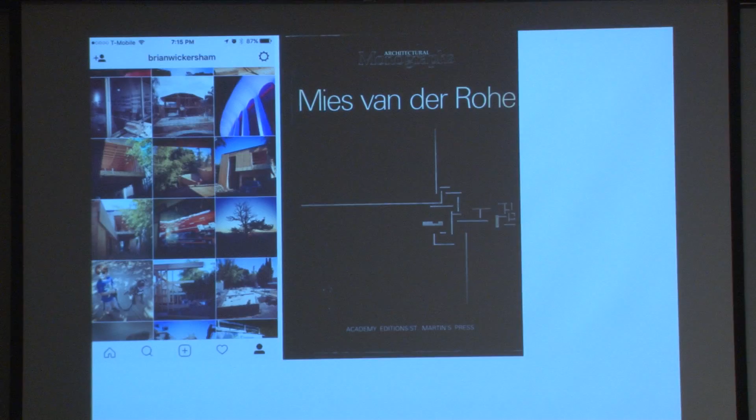I don't know that it's a bad thing or a good thing. I think it's just the context that we're working in today. And I think that it's beyond images, and it's about ideas. And ideas have become more efficient in so many ways. Could the ten books of architecture be boiled down to ten tweets of 140 characters?

I don't know if this is a good thing or a bad thing, but it sets this context in which we work, and it's ultimately the context in which we started our own practice. So within that context, for me, it's really about what are we about. When we started out, it was 2008, absolutely the worst possible time I can remember in my life for the economy.

But it turns out it was a really amazing time to start a business, because it was a time where you had to fight tooth and nail to do anything. The lessons from that time are lessons we really apply today. We made a decision very early on that what was most important to us was to build and to learn through building. We weren't going to be an office about academic pursuit or about going out and hiring PR and marketing firms. We wanted to learn from building, and honestly, if you build it, you build the business. So much of our work came from finishing projects in this period when there just wasn't a lot happening.

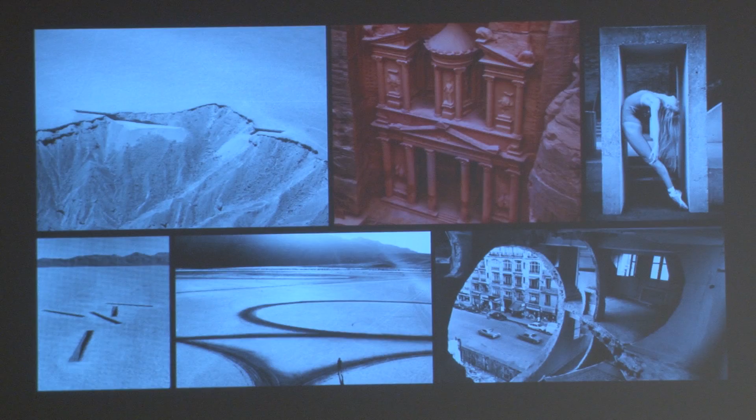Where that really starts for us conceptually is at the inside of the building. We talk a lot about this in our work - the thing that's inside is so much more important than the thing we do on the outside. I think a lot of architecture today has become this additive endeavor - you create the box, and then apply things to the outside of it. We've tried really hard with all our design to focus on the purity of the space and not add things that can easily be removed. It's this idea that if that piece was taken off the building, is it still a good piece of architecture? And if your building is dependent on that thing tacked onto the side, is it still successful?

It's that understanding, like with the Michael Heizer piece, that a really simple incision, a really simple spatial move, can be incredibly powerful. It doesn't have to be this grandiose thing. It can be really simple - to affect a surface with tire tracks, or walking in the sand, can be a really powerful thing. These are the ideas and things we're drawn to.

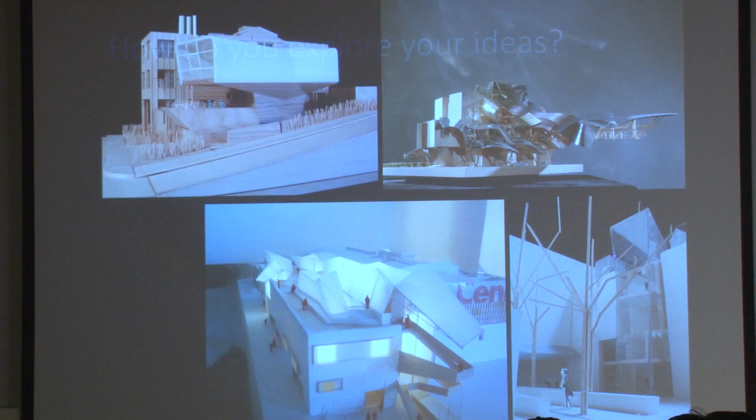For us it's really about - these are the things we love, how do we accomplish that, how do we explore these ideas. So it kind of goes back to the beginning, where you start out and where you come from. For me, I moved to LA, and my first job was in the model shop at Frank Gehry's office. I worked on the Marqués de Riscal winery, building this incredible model - about 7 feet wide by probably 3 feet tall.

As we were building it, one of the things that the more senior people in the office would always say is that the model doesn't lie. The model, if it stands in the model, it stands in reality. You can't fake things with the physical model.

From Gehry's office, I went on to work at Daly Genik, which was a spinoff from Gehry's office. It was the same methodology, studying form quickly with study models, and then gradually refining more and more those projects to come to the ultimate design. Oftentimes, like the top left image, the end result that we showed to the client was the physical model. It was something you could get down around and look at. It wasn't just a singular image that you were focused on. You really interacted with the thing.

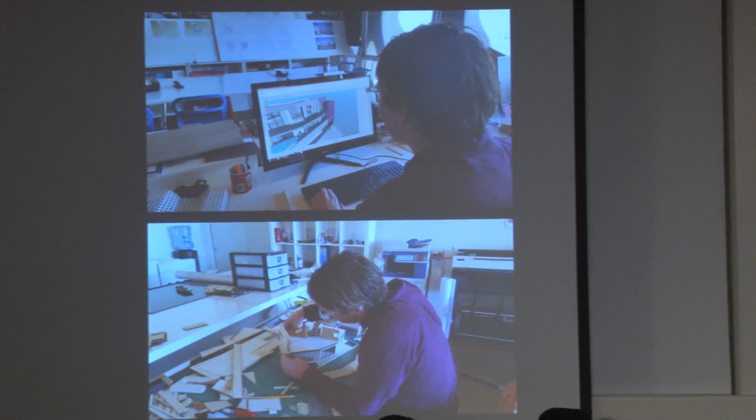These were important lessons, and they're important lessons that we use in our office today. We still build a fair amount of physical models because it is an important and powerful tool. But more and more, out of a necessity for speed or budget or just for sake of iteration, we're using computer software to do the things that we were once doing with physical models. To do that, there's a series of rules that we put in place to ensure that we're looking at it the right way, that we're not distorting things. It's sort of working now seamlessly in and out of both physical and digital realm, and prototyping and doing study models, both physical and digital.

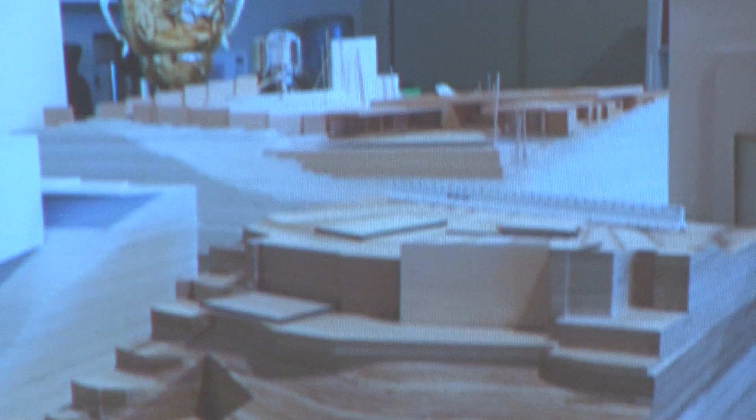Actually, I do have to stop for 2 seconds. In the back, the gold chalice there, that's the Architectural Softball League Championship trophy. Had 4 wins, I think only a couple against you though. One year, one victory in 15 years? Well, it's hard to keep track. Ed's a great player and a good friend. And so you do realize that slide is only in there to point to the trophy in the background. Are you sure you want to go on? I'm enjoying talking about this and seeing you shift around. How's the leg coming along too? You're going to be ready for, oh, sorry, too soon.

So, to the rules about how we're using the computer model, the rule that I said before with the physical model doesn't lie—there's a truth to it that we don't have in the computer. The computer can really distort things. We try to be really careful about knowing when we're trying to make an image more dramatic for a pitch on the design versus ensuring that we're using it in a way that we know we're getting the end result that we expect at the end of the day. So really simple rules like, you can't use a camera angle with a ratio more than 35 to 50 of what the human eye sees versus going to like 15, which makes a wall look like it's 90 feet longer than it really is in reality.

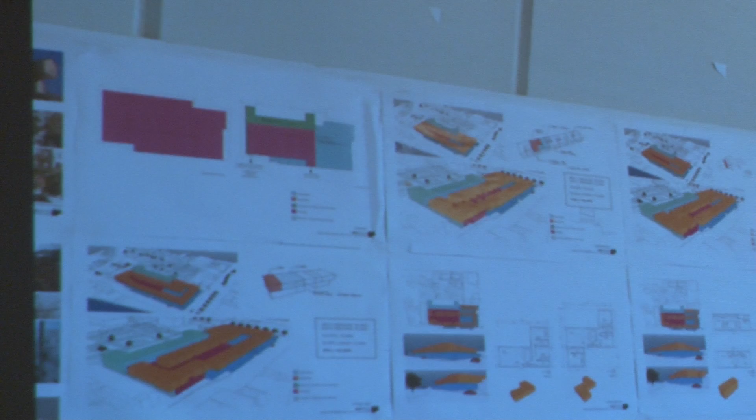The other thing is finding ways to get the digital model out of the computer. Because one of the things about the physical models is that there were things that sat in our offices, things that we interacted with, that the entire office moved around and knew about and engaged with. So one of the things that we do in our office is every day or every week, anytime there's a major milestone in a project, the team pins up screen captures of the model. This is so it's out in the office, and people are engaged with the projects that they're not working on, because a lot of times ideas come from people that aren't directly working on the project, and when it's tucked away and it's a person sitting at their computer only working on it, people don't know what they're doing. You get a glimpse, but it's not there, it's not in the consciousness of the office.

So we make a really conscious effort to have these things out in the office, and we encourage people to react to projects that they're not working on for a lot of reasons. Good ideas can come from anywhere, but I think it's also that not all the projects in the office are the big flashy fun one. We want everyone in the office to feel like they're working on every project that's happening, that their role on something else is a part of this other thing happening. That's really just this idea of team that's really important to us.

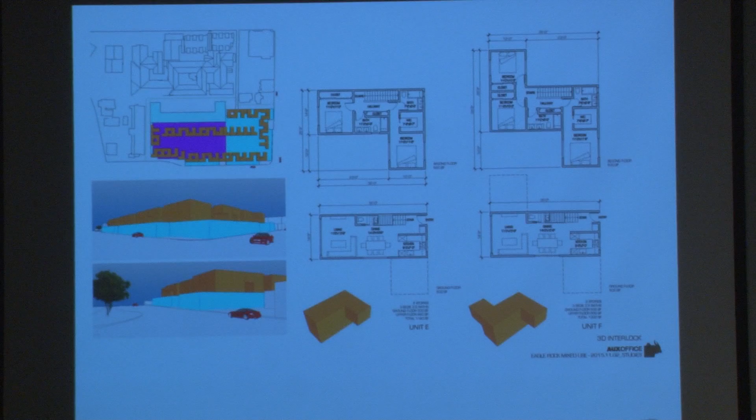Aside from that, we're really using the software and digital models to do the same thing we always did with physical models: cutting out blocks, looking at schemes, laying out different variations on an idea. Where the software is really beneficial is we can now do 10, 15 of these in a day. If this was a physical model, you'd be lucky to get through 1 or maybe 2 in a day. The speed it affords us lets us look at a lot of things much faster than we could, and I'm not that old, but just a decade ago.

The transition has been really amazing, and it's cool to apply these same lessons we learned with physical models into the digital realm. The other thing that's really important is the software allows us to look at material options and surfaces in a much more precise way than we ever could before. I think that's something physical models always failed at. You always had that one corrugated basswood panel to replicate some surface change in a building. The material shifts and the interplay of surfaces, textures and material is super important to us, so we look at a lot of options, and it lets us test out a lot of different things really quickly.

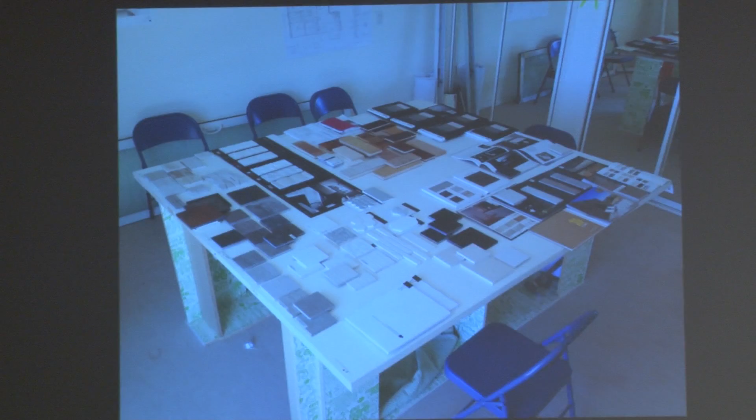Literally, if we like a wood surface or a tile surface or a stone surface, we can throw it in there, check it out, see how it looks, see what the scale of the panelization is.

These are all really amazing things that are really important to the work we do, because it's important to us not just the exterior envelope of the building, but also the interior. I think there's been a disconnect in a lot of ways with architecture, where it's become so specialized that many architects just consider themselves core and shell guys - they just do the envelope and then somebody else comes in and does the interior. For us, it's really important, that connection of inside and out, and so the materiality really is an important thing to us.

And so is lighting. With the digital models, we're able to look at variations really quickly, look at different times of day and night to see how a building's going to glow, to think about how surfaces are going to be illuminated. These are all really powerful tools that we use every single day within our studio.

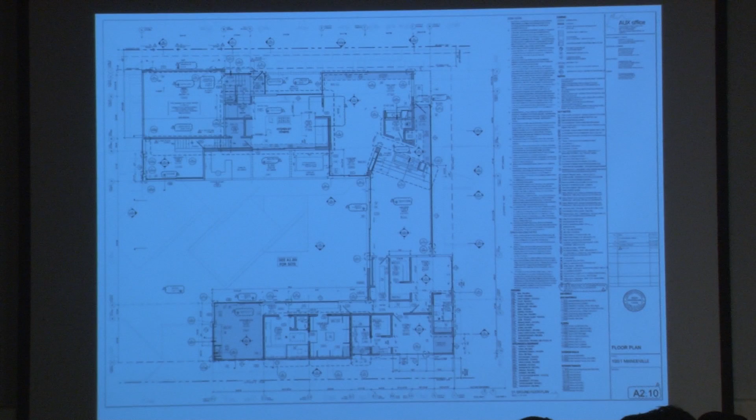And then finally, this hasn't changed much from the hand drafting days, but the last step is really doing the working drawings and really precise, high quality drawings. I know this is kind of a weird thing to talk about in an academic setting, but it's a really crucial and important part of what we do, because design decisions don't just stop at the rendering - they carry through the entire project.

It's really important that we don't make this separation between design architects and technical architects. We want the best designers in our office making decisions at every level, in plan, in section, and in detail, because it's ultimately in these details that the building really comes together. You can have a grand vision and represent something with a beautiful image, but if the detail's not there, so much is lost.

So that's kind of the method. You know these things and learn them as you go, but it really comes down to: does it work, and does the process get you where you want to go?

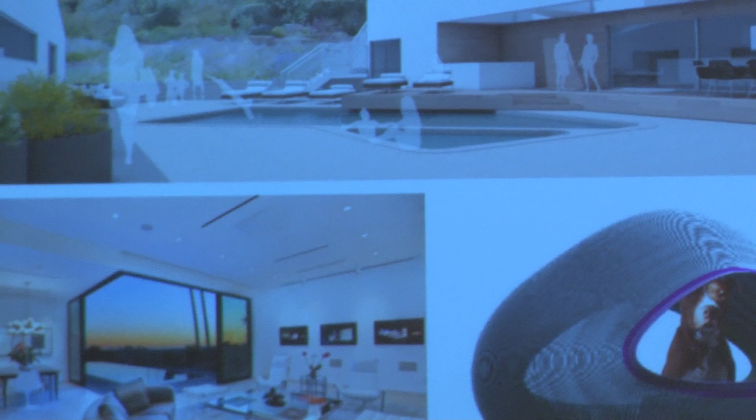The scale has really grown and shifted, but the ideas and the methodology has been pretty consistent. Tonight I really want to focus on the opportunities and moments that were most important to us along the way, the things we learned from most, the good and the bad, just to give you a glimpse into how we think.

Every office really has their first big opportunity. Obviously we had Rudy as a client, but our first thing that really got noticed and projected us into the next scale of work was a crappy house up in the Hollywood Hills. My business partner's wife literally responded to a post on Facebook for somebody looking for an architect to work on this house.

It belonged to her and her boyfriend, who's a rock star, who had just moved into it. It was a beat up place, had been lived in by a number of celebrities over the years and was just really run down. They basically came to us with this really simple thing. They said, we love to throw parties, and the problem is the kitchen is on the other side of the house from the pool. Can you design us a pool bar? It was really just that simple.

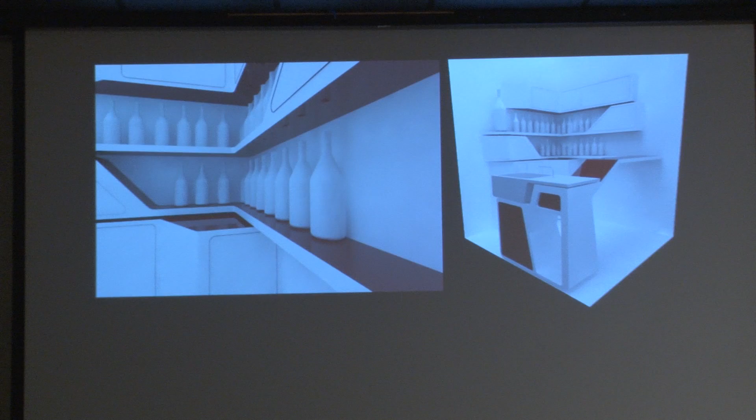So we went to work looking at what it is that would be a cool bar, a cool transition piece between the pool and the inner part of the house. We studied things with a lot of variations, looking at different material qualities and surface interactions. We worked through this process, and it was this sort of inevitable thing that happens with residential work, that it went from 'oh yeah, we need a bar' to 'well, this is the pool bar, we really got to look at the pool.'

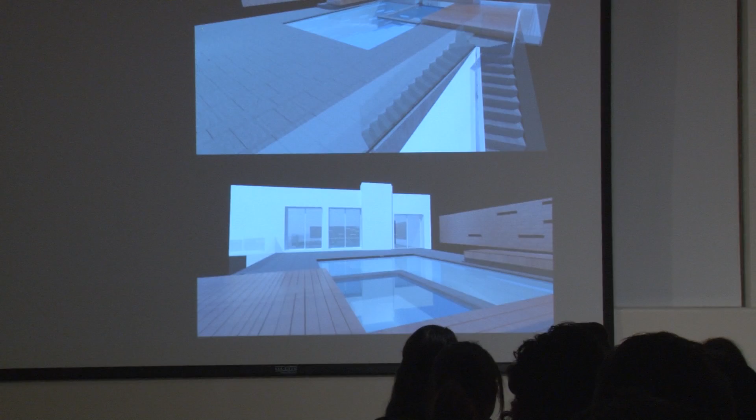So we started to look at options for the pool, how we could do a jacuzzi within the footprint of it, and a lot of different variations. Unfortunately, with some of the earlier projects, we don't have as much documentation for the process, but we went through a lot of iterations, and this became a project that we worked on for about five years.

We'd finish one thing and we'd move on to the next, but it was really about literally getting in there and just going for it, doing the dirty work when you had to try to illustrate that, no, this wall we can take out and the retaining wall is not going to fall over.

Ultimately this project, which was really a series of little installations, kind of came together. It's a modest thing, but we learned a lot of lessons about how you get a lot of impact with a little move.

Looking from the living room out, we had this really ugly wall and waterfall at one point. So it really became about how do you create something that has some rhythm, that has some meaning to a musician living in the house, and the interplay of surfaces and extending out that deck to get a little bit more area. It was, in a lot of ways, just this really simple little project that kept expanding.

But materiality and surface, ideas that are really important through our work today, so many of those ideas were in this little job. The play of light on surface, a really simple interlock of two materials, stone and tile turning up a wall, interlocked with white drywall.

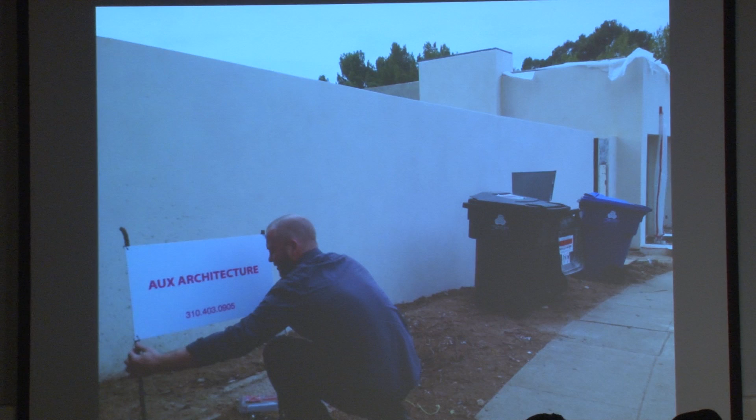So this job was a small thing in the grand scheme of things, but what it afforded us was the opportunity to hang out our shingle. It seems silly, and we never anticipated it at the time, but the fact that we were able to put our sign out when nothing else was getting built is what the entire practice really built on. As the economy was improving, people started driving by and seeing that somebody was doing construction, and would think, well, we can start to think about that too.

We literally started to get phone calls from our sign. It never ceases to amaze me that so much of our practice came from people calling that number on that sign. So just a couple examples of some of the houses.

This is up in Doheny Estates, right north of Sunset, kind of going up above the Whiskey A Go-Go. From that top vantage point on Doheny, which is the top right house, we've done 5 houses just in that little stretch. And all of that really came from that one little project.

I think so much of it was about being willing to take the risk at that time, even on a little thing, and the reward is still paying dividends today—in a lot of ways we didn't really think about or expect. The biggest one was that we were all of a sudden sort of valid, and we'd proven that we could do it. Once you prove you can do it, people believe in you. And just a simple thing like that makes all the difference in the world.

One of the contractors who had looked at that house when we were doing one of our phases took note of what we were doing, admired our drawings, admired the design of it. When his friends went to remodel their house, he said, you know what, I think these guys would be a good option for you—they're really young, they're really hungry, they're doing really cool things.

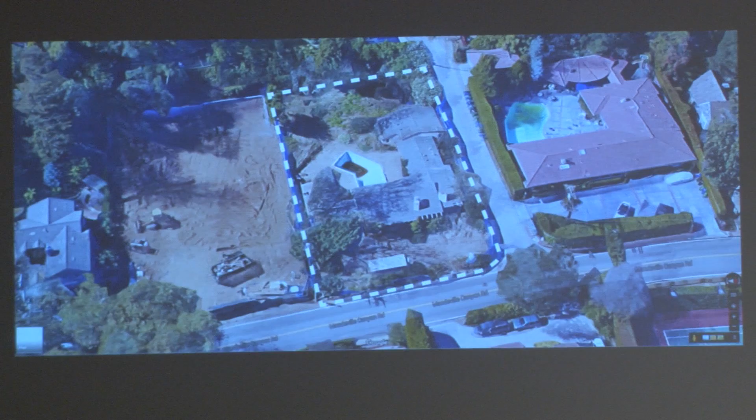So we got this call kind of out of the blue, for a house in Mandeville Canyon. It was a ranch-style house from the 1950s that sat literally right on the street—a busy street, a lot of car traffic, a lot of bicyclists, but a really prominent corner. I think it was an opportunity for us to do something at a busy intersection that people would take notice of.

So we started into this job, still kind of fleshing out the process, but ultimately looking at this house and realizing, as we had conversations with the homeowners, that they actually really liked the way the house functioned. So rather than tearing the house down, we said, it works pretty well—maybe we can strip away the stuff you don't like and do a couple really simple additions that get you the space you need.

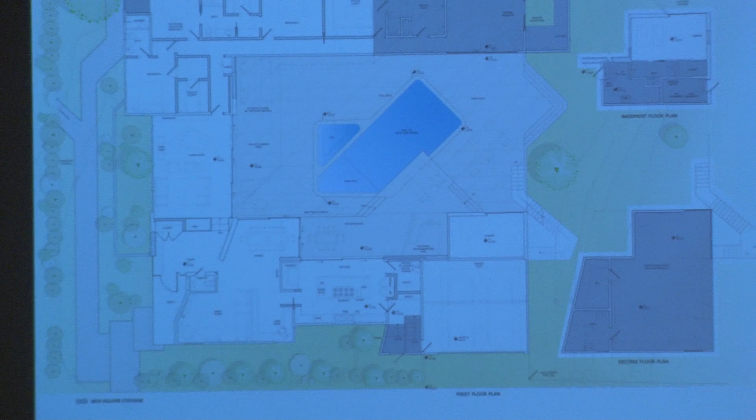Really the heart of this house, the center of it, is the pool. The corner in the bottom left is Mandeville Canyon and Herd Place, and that becomes the main entry point into the family living wing. The secondary functions, the kitchen and laundry room, are tucked off to the garage, and at the top of the drawing are all the bedrooms.

So it really became about: the building works pretty well, it doesn't need a ton to it, it just needs a new aesthetic. So we started to study how we could modify the building and really transform it with material, with the shifting of mass, and the folding out of surfaces to define new spaces.

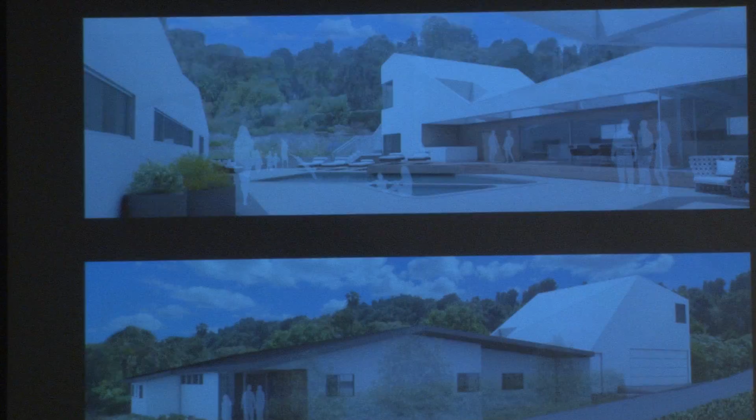We went through a lot of variations, including this faceted scheme that sort of folded out from underneath the roof line of the house. Ultimately, in conversation with the family—a modest couple, really great couple—they said, you know what, we're just a little more simple than that. And that's fine, because that dialogue with your clients is really important, and that dialogue to come to an end result is a really important thing.

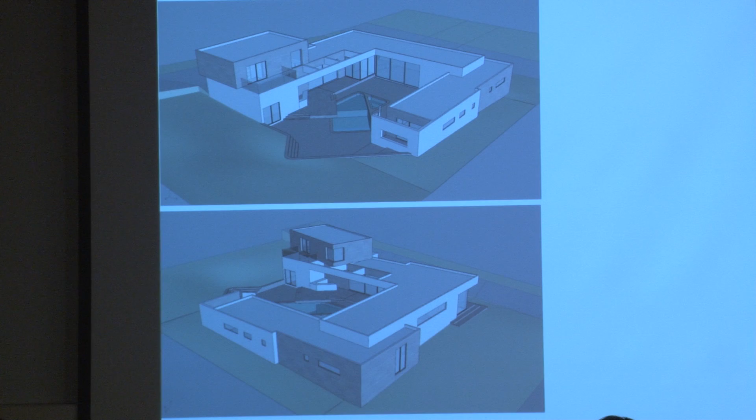So we backed up a step and said, all right, what's the most important thing with this house? It really was this interlock of the common shared spaces with the guest house, which was going to be on the garage in the back, the two-story portion, and the bedroom wings. So just this really simple idea that we can have a few masses that interlock to create this really simple composition of things.

The material palette was two materials: cement board that we cut away to expose different cut surfaces and different colors and textures, and then just white stucco.

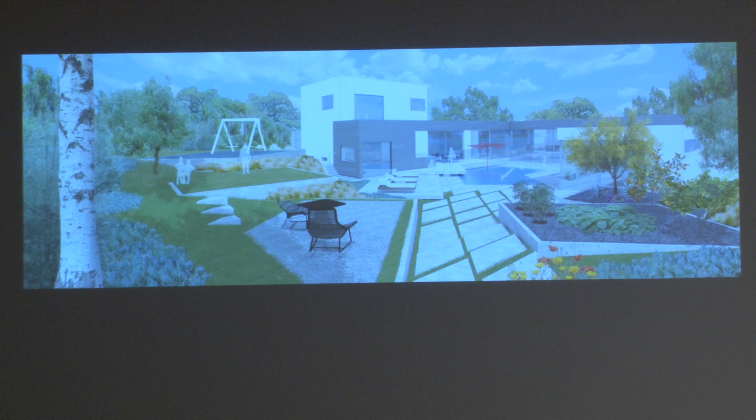That play sort of wraps around the house and interlocks, really to preserve the thing that was best about this house, which was this interior courtyard space tucked away off of the main road—really just this beautiful sanctuary, which was the thing they were drawn to initially.

And then really simple things like big sliders that allow us to reinforce this sort of inside-outside connection that's so important to life in Southern California.

The weather is so good so much of the year that it's really unfortunate that we make these barriers so solid. We always try to break down those barriers and make it feel like nature is really coming inside the building. And then the disintegration of hardscape, taking the pattern of the concrete tiles and pulling them apart.

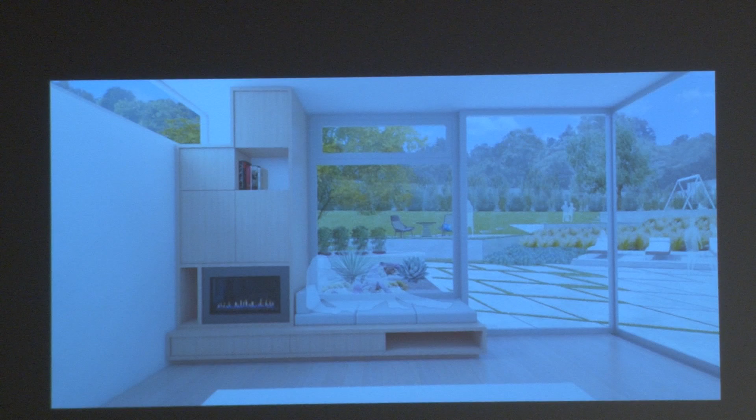That way there's a blurred line between the natural and the man-made, and the overlap of surfaces, inside spilling out into outside. And then ultimately framing the rooms with nature, making it so the sanctuary is not just on the outside, but pulled to the inside. This is the master suite looking out into the gardens.

The interlock and the quality of light throughout the house—just really light and bright surfaces, making the most of small spaces. And then really attention to detail and cabinetry and the interplay of materials on the inside, interior design and light fixtures.

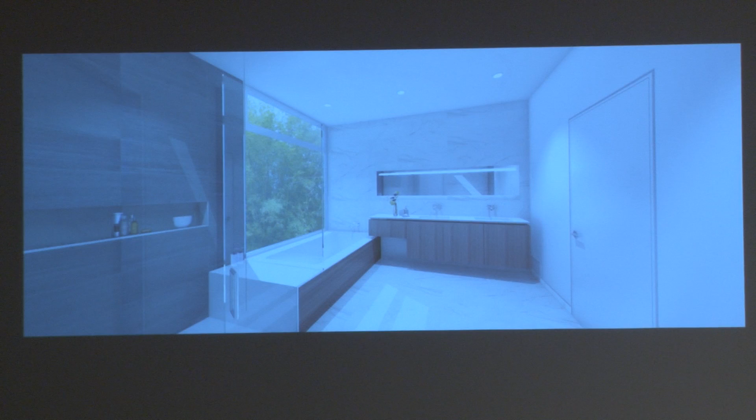Again, the interlocking motif—master bath with just a few simple materials that interlock at different scales. And then the guest suite and office.

This job, although we started it a long time ago, we've actually just started construction in the last 6 months. So it's really exciting to see these things mature and grow and change and come from a sketch into a living thing. It's always an amazing thing.

It's really important to us that we try to rotate, because a lot of people work on these things over the years. So we always make sure everyone gets an opportunity to go out and see these things come together, because it's really the most exciting part, where you start to see your vision come to life.

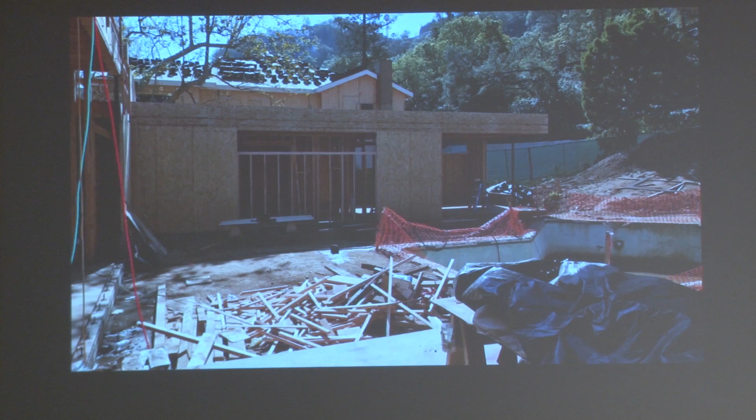The master bedroom—the weird pitched roof thing in the back's not us. And then the incisions that carry through corners and carry through the building mass to define some of these overlaps.

And then ultimately, this is always exciting to me: actually looking like the thing you've been working on. That's why it's so important, as we work through the computer models, that we're always considering that and thinking about it, to ensure it actually turns out the way we expect.

So the next job is also a renovation project. This one is up in Malibu off of Stunt Road. Previously, most of our renovation jobs had been in much more urban conditions. So this job was really exciting for us because it's just this really beautiful site.

It's one of those sites where you really feel like there's nothing you can do to screw it up other than make it so you can't see the view. And that's why it was so amazing when we got up to this house and realized that all the windows of the existing house were so tiny.

On this job, sometimes the process goes really quickly. Sometimes it's really easy to identify the issue. On this job, it was really about how do we capture what is most powerful about this site, and that is the setting in the mountains, the seclusion, and the view.

So the agreement we came to with the county and with our client was that you like the house as it is. Maybe what it needs is to be stripped back. It's about what we take out, about opening it up, and about light. We quickly realized so much of this was about stripping off the finish, getting to a more modern aesthetic, and opening up the house in a way that let you see nature and the views and appreciate the things around you differently. So we worked within the existing building footprint and roof lines and started cutting things away.

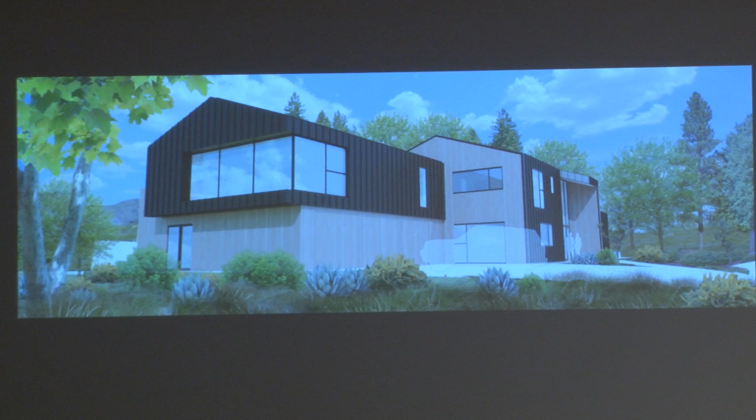That cutaway is something we talk about and express a lot, where we thought of the existing building as a mass that had been cut and shifted. On those shifted planes, we made the transition to wood — the black liner and then the cutaway surfaces of wood. Again, just opening the thing up, making it a space that bled inside to outside. Those exterior materials reflect the idea that materiality shouldn't live in just one environment — it became about how we take these materials, carry them from outside to inside, and integrate them in ways that compositionally relate to the windows and bounce light off the surfaces.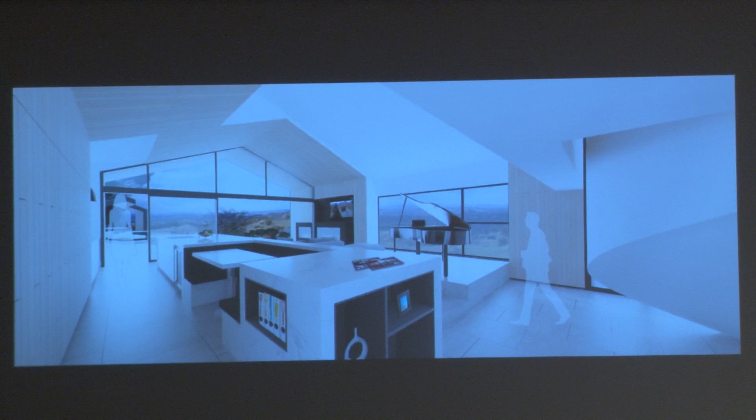And this is ultimately what we're building today. Again, the renderings are actually pretty true to the views we have. It's just a really clean, simple space with really rich, warm materials.

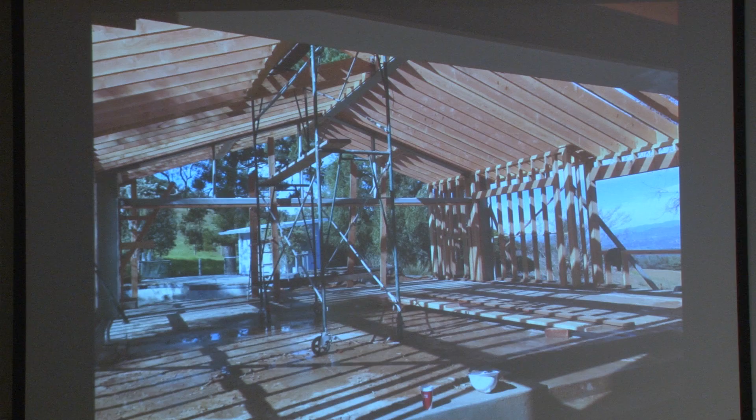They framed that wall wrong, so that gets cut down.

We've done a lot of renovation house projects over the years, but we've had some opportunities to work on bigger things. Our entry into that world came in a pretty strange way, with a weird project that a developer I've known for years brought to us down in Harbor City, by Torrance. He had just bought this really strange piece of land in a neighborhood that wasn't so great.

Like a lot of projects in Los Angeles, a firm or architect or engineer will get a project entitled, design it to a certain point, and then the project gets sold. Our client bought this property, and it already had a design for it.

He came to us and said, hey, I know you haven't done any townhouse condo projects before, but would you like the opportunity? And we jumped at it. Multifamily is something I love to do. It's a different scale of building. We were really excited about the opportunity, so psyched to have something so big.

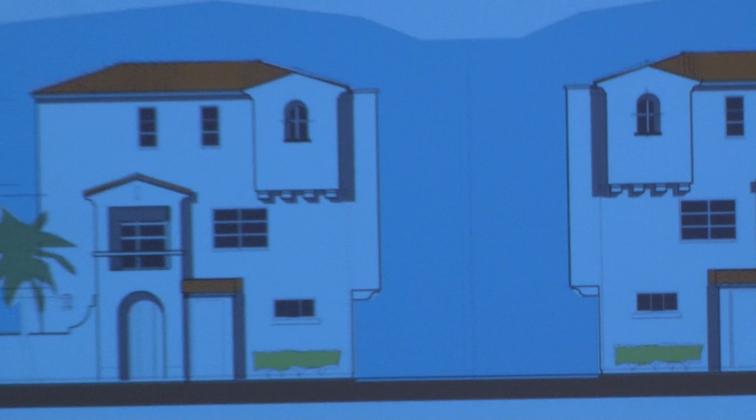The only problem with this project was that it looked like this when we got it. There's nothing wrong with Spanish-style buildings—when they're done right, they're really amazing things. But it's not really our thing, and it wasn't really our core competency. But we knew the ends justified the means, that doing this was going to get us to a place we wanted to go, and a jump in scale that we really wanted to get to.

So we took it on. We sort of said, you know what, we're going to forget our egos for a minute. We're going to forget what it is that we think we need to be doing, and we're just going to do this as a learning experience, as an opportunity. So we said, all right, let's make the most of it.

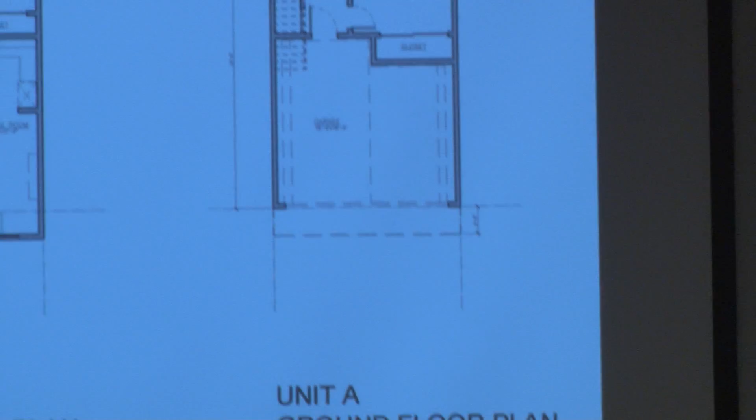We started out really simply, just saying, how do we make the spaces incrementally better, just a little bit better than they were? The original floor plan was really chopped up—a lot of spaces without much natural light. By removing things we didn't need, we got to floor plans that were really open, had lots of natural light, and were much more modern, cool, and livable in the way that we look for.

And then we literally just applied that module across the 7-unit and the 3-unit building. It was a really simple exercise.

As we're going through this process, a lot of what we do is educate our clients and talk to them about ideas. So on this job, as we went through the floor plan, we incrementally put it in the ear of our client that maybe we should try something just a little bit different.

One day we were down at the site and I said, look, the biggest problem you have is that on Western, people drive like 50, 60 miles an hour, and in this neighborhood I don't think people are going to notice this thing is here. The building sat behind this weird strip mall. I said, give us a chance to do something different, something more site-specific that responds to this really busy street. And he was really hesitant to do it.

A lot of that is because people get so set in a mindset of, this is how we do things, this is how we always do things, and we do it this way because it's successful for us. It's really hard to convince people otherwise. When they've been successful at a certain thing, why would you ever change it? So it's a tough thing to get people out of that mindset.

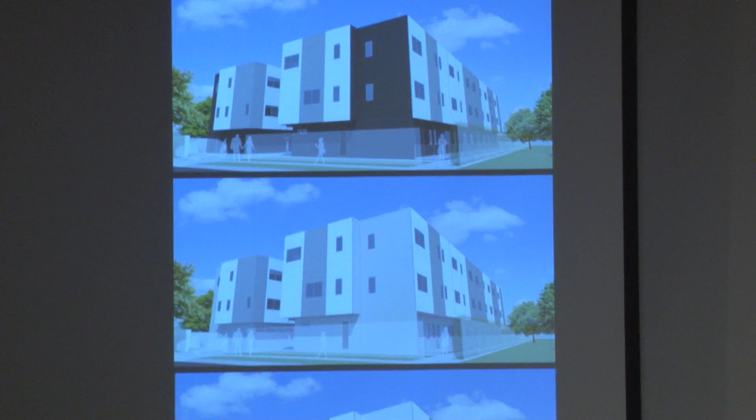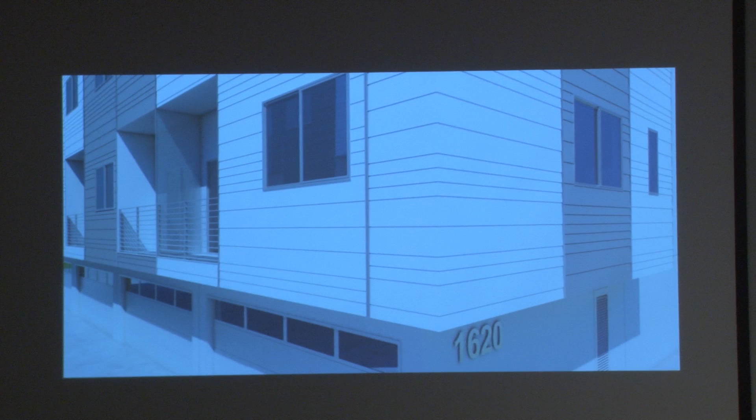This went through literally thousands of iterations, and ultimately started to work from the 2D drawings and studies into studies in the three-dimensional model of this pattern that worked at two different scales. There was the macro scale, these bands of white and gray that read like fence posts as you drive by, and you read that pattern in different ways. It also worked at a micro scale: within each of these bands of paneling, we made this really subtle shift.

That way, from a distance, the building had one appearance, but as you got close, you started to read a different level of detail. And so we worked through this, and despite the risk and the concern on their part, we got this thing built. In so many ways, it's the same basic footprint and massing as the original thing, but it's a very different image and aesthetic than what we originally started with.

With this really subtle shift in the siding, we were able to do something sort of interesting, something a little different than what this guy was used to doing. And you always have to have a Volkswagen Bug in at least one photograph in a lecture.

And the Goodyear blimp. It's very close to Carson.

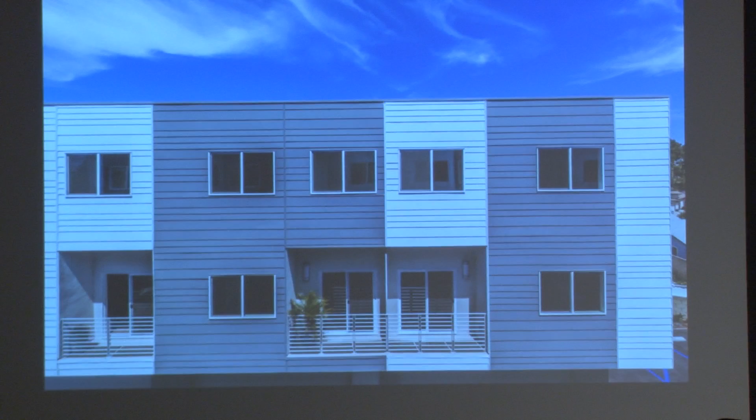This job was a big thing for us because, like that first house, it showed people that we could work at a different scale. But more importantly, we were right in our assumptions.

The developer, and developers are driven by money in a lot of ways, but he said the target for each of these units, which are about 2,000 square feet, was about $350,000 per unit. And when it was all said and done, they sold these for about $550,000 to $600,000 per unit. If you're going to convince a developer to do something a little different, that's basically the way you do it. It was super successful, and it worked on all the levels we talked about.

It ultimately did a lot of the things that we talked about all along. The neighbors talk about it as the striped building, and it's this really striking thing as you drive down Western. This developer, on our success of making him more money by doing something a little more modern, brought us another job he'd bought that was pre-designed.

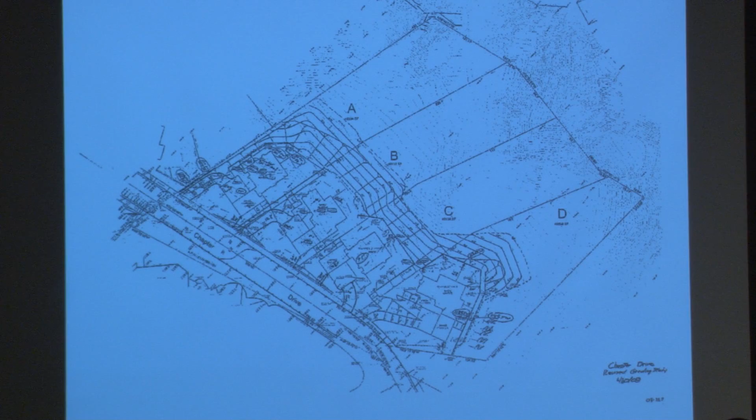This one was 4 acres up off of Mulholland near Woodland Hills. It was a subdivision taking 4 acres and dividing it into single-acre lots with a 7,000 foot house on each of them. It looked something basically like this. I'm sure they were fine houses, but it wasn't really our thing.

So we started to talk to him again. We said, hey, the last one worked pretty well, we made you some more money, right? He sort of said, yeah, begrudgingly, maybe there's something to this more modern stuff, the open floor plans, lots of glass, and the materials we were using.

I said, look, I'll make you a deal. We're dividing this into four parcels, why don't you give us a shot at one of the houses? We do whatever we want. He said, all right, I'm gonna give you a shot. You get to design one house the way you want it, and two houses the way I want—one has to be Cape Cod, one has to be Mediterranean style.

I'll let you do one that's kind of transitional, and then on one of the lots, I'll let you do something completely modern, an open floor plan. He then gave us the most complicated, steep, difficult site to work with for the modern house, which was the most amazing part of it because it was so steep, we had to address the context in a different way.

In order to keep the building underneath the max building heights in the area, we had to create this aesthetic, this massing of blocks that offset and step their way up the hill. This terrified him because he thought when this goes to design review and to the community, they're going to hate it.

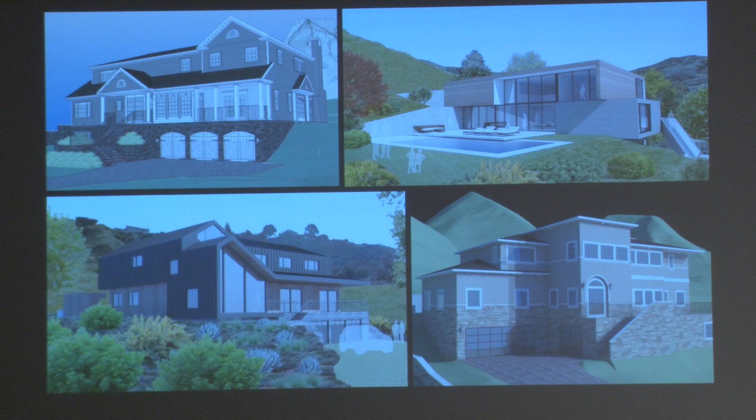We got it into the community meeting and in front of the design review board, and as it turns out, the two houses they liked best were the modern one and the one that was kind of transitional. It was a real lesson in just believing in what you do and that you can be successful at it. The design review board liked the ones we did better for being contextual, and we're currently redesigning the other two to be more modern.

Along the lines of lessons you learn, one of the things when I was working for Kevin Daly, he used to say: never draw more in the morning than you can erase in the afternoon. I always took that as don't get too far ahead of yourself, because I'm going to change what I told you to do this morning. But I think the real lesson is that you set out with good intentions or a thought process or a plan for things.

In a lot of ways, it's the process that drives the project, and projects can go in really weird, interesting directions that you never anticipated. The next job is really that one for us.

It's a beautiful site. A lot of the work early on was smaller scale, and this job was our first opportunity to do a big ocean view Malibu house. It was a really beautiful site up in the north of Malibu, by the Malibu Village you see off to the left.

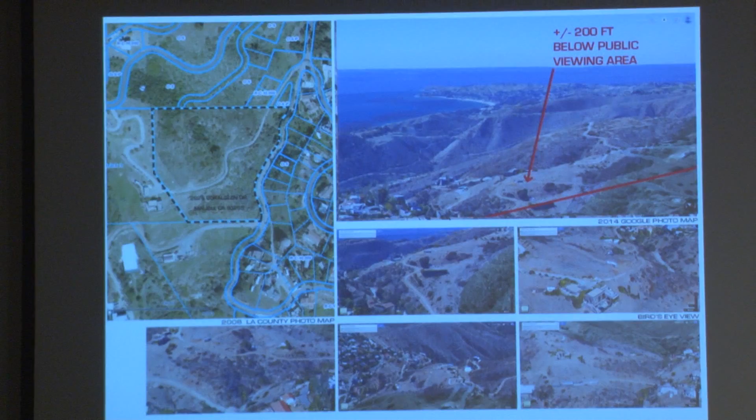It was up in the mountains, so you had great mountain views, amazing ocean views, and actually a relatively flat site. You don't want to become too much of a slave to the site, but the most interesting thing about this project was that the client was a Chinese family of four sisters. Two of the sisters live here in the Los Angeles area, and the other two live in China and operate the manufacturing for their business here in the US.

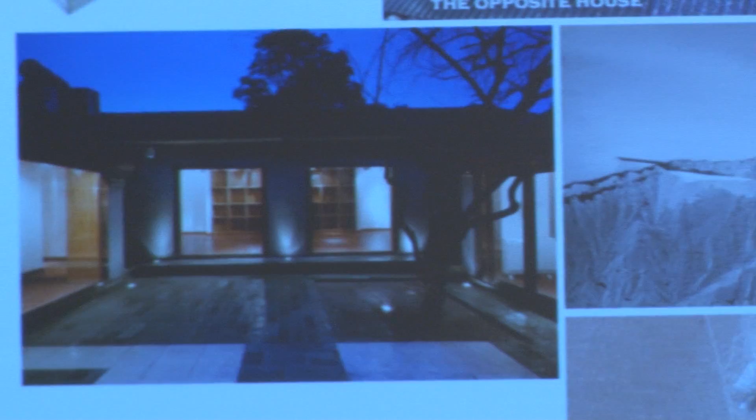They came to us and said, look, we want you to build us a house that the entire family can come together in, which was like an amazing, almost school-project kind of program. All right, we've got four families - they want some independence, but they also want this house where the entire family can come together for big gatherings. In so many ways, it was like a little boutique hotel.

Several years back, I had the opportunity to do some work in China, and I learned a lot about the traditional hutong house - basically a series of four houses interconnected for a multi-generational family that open up onto a single courtyard as the shared common space. When we started talking to them, we said this is really going to be a modern hutong, and that was an idea they really loved. They didn't want something traditional, but our riff on that idea was what they were really looking for.

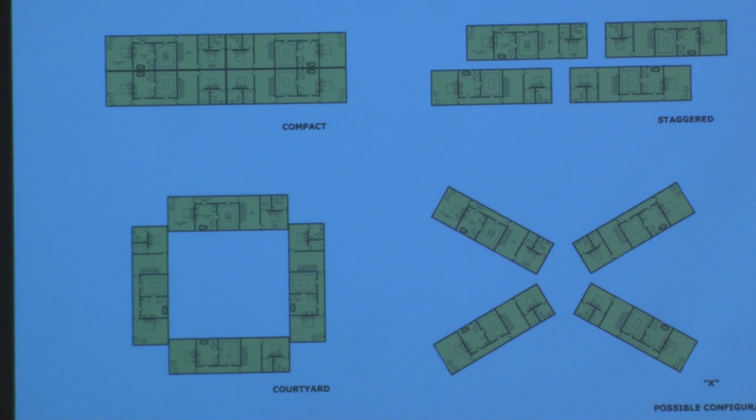So we went to work looking at this as a series of pods, where each family had a master suite, a secondary bedroom, a little living area, and a common area within their own loft space that allowed them to make a little meal or have some privacy. We looked at this in a lot of different variations to create courtyards, create slippages, or open things up to views. This was really the driver.

How do we do a house where you get the view and also get the courtyard? The challenge was getting all these things into one property that really wanted to be a directional building looking out towards the view. The other complexity to the site was that in Los Angeles County, in the Malibu area, you're required to do an environmental review, which is a really great thing - the preservation of the environment is really important to us.

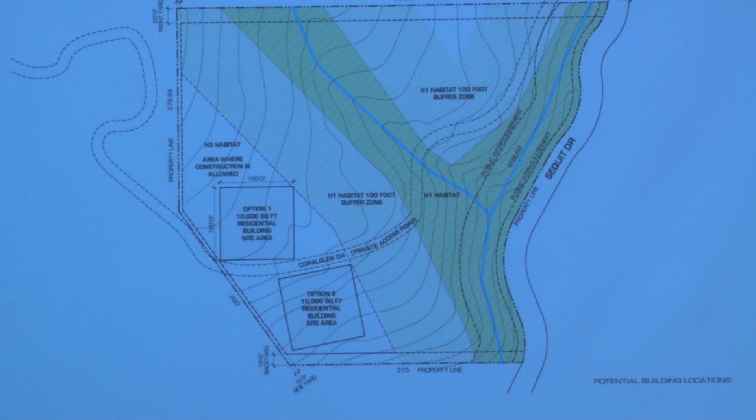So we had our initial environmental review done. The county biologist came out and said there's basically this riparian area that comes together like a Y, and you have to stay 100 feet away from it. That really took away a lot of the site and pushed us into one corner, which unfortunately was a little close to the adjacent building, the neighbor's house. But we said, all right, we'll make the most of it. We'll make this thing work.

So we went to work putting these pods, these blocks, into different configurations and trying to figure out the best sort of scenario for this modern Hutong village. Some of the schemes were a little weird, a little wild, but very cool, until we ultimately arrived at this basic scheme.

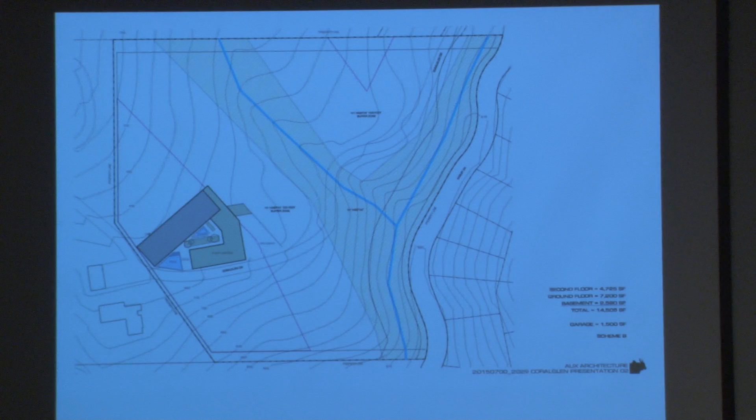The basic scheme was with the magenta, the pink block. It was all the common spaces, the living room and the kitchen, and all the spaces the family would share together. Then the yellow block was a 2-story pod that had the shared family space for a single family on the ground floor, and the bedrooms above, looking out to the view over the top of that lower common area building. So we took the roof of that and made it into a green roof. That way it didn't feel like you were looking onto the roof of your neighbor's building. We pushed ahead with this and started looking at the next level of detail.

We looked at what these private courtyards would be like, how they would open up to the pool area and out to the views of the ocean. We went through a lot of iteration, and ultimately came to a massing a bit like this. It's south facing, so sun control was a big part of the project, and we were looking at huge shade structures that could block out the sun.

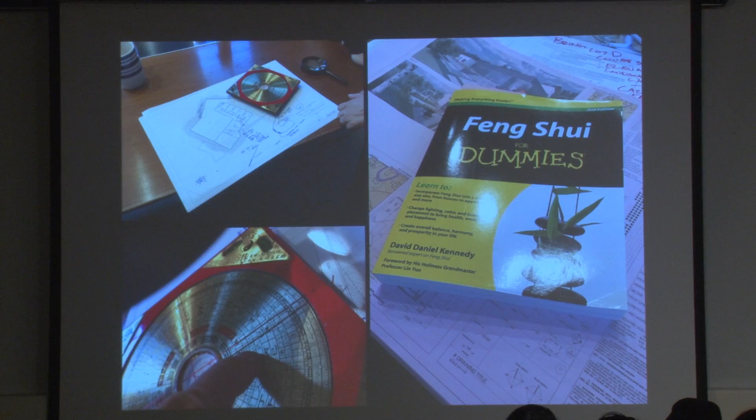And then we got hit with something we didn't really expect, which was the opportunity to learn about feng shui. I have to admit that when the family brought it up, I sort of winced and thought, I don't know how all this works. But again, it was sort of like putting ego aside and saying, let's think about the opportunity to learn about something new. Let's be curious and find out a little bit about something we don't know anything about. So we said, yeah, let's do it. Let's try it and let's see where it takes us.

So we broke out the feng shui compass, and we talked to each of the sisters about which coordinates were the ones they most wanted for their particular pod. That became a really interesting form driver for the project, because 2 of the sisters wanted prosperity, another wanted happiness, and another wanted long life. By taking that compass and working through the coordinates and the lifestyle wishes of those different coordinates, we were able to generate some really interesting forms, and ultimately come to a configuration we wouldn't have had before.

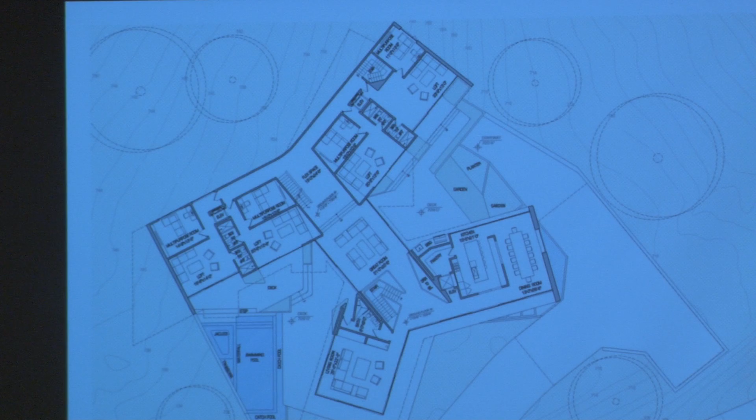Sorry, this is a little bit distorted for some reason, but what we ended up with was basically 2 courtyards. A courtyard that was gardens and places to grow food for 2 of the sisters, and a courtyard that was more open and opened up to the water for the other 2. That linkage then became this great room where the entire family could come together and share in the space. And then there's the garage plan that's a little distorted, we can go through.

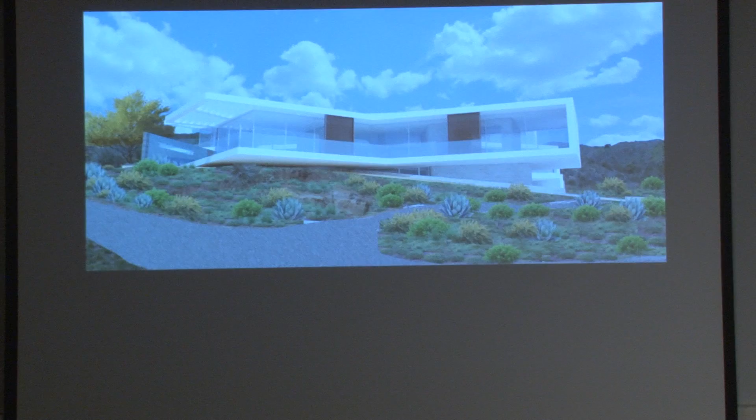Working through the massing of this, it really became about how do we have equitable views and equitable space for everyone, because by nature, the corner suite is always going to be kind of the nicest one. So we looked at using a mass for the bathrooms and closets to focus views out. That led itself into, how do you minimize the block that's in the front, so that everyone can see out over the top of this thing? So we pushed the common area down a little bit, and then stepping the building up the hill, we brought up the mass in the back, so the entire building looks out over the top of it.

Feng shui also gives you the opportunity to put water right at the entry, which is also really cool. So we were looking at doing this really amazing 14,000 square foot concrete house. We were pretty far along into it, just starting to look at the materiality of the concrete and how we could affect that texture in different ways.

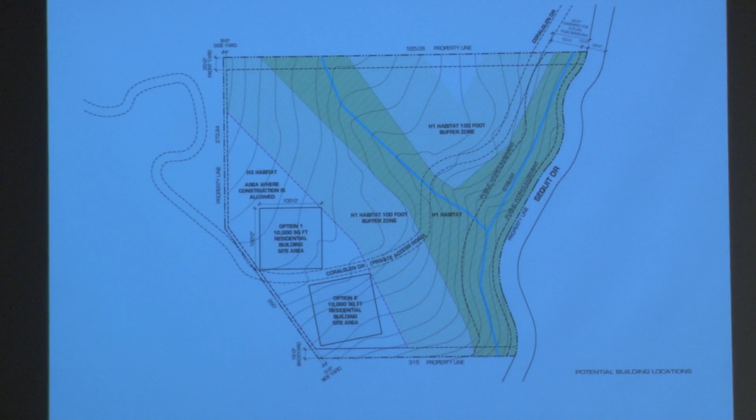And we came back to this thing. Where we initially thought our habitat needed to be protected, in the spring the county biologist was driving through and noticed a bloom of wild grasses that fell basically right in the footprint of our building. As something protected, it was something we had to steer clear of, and it threw the project into a completely different direction.

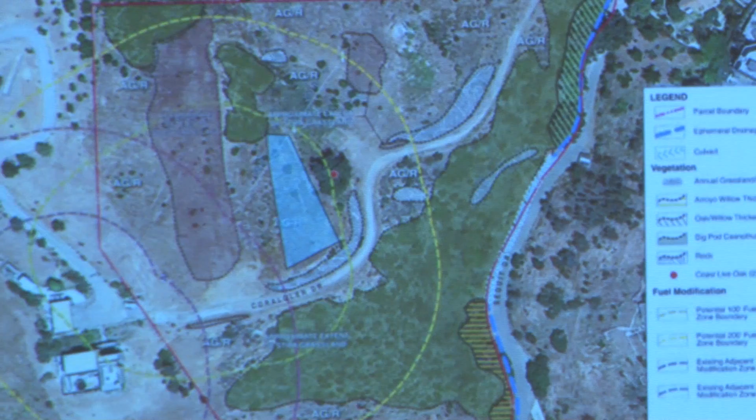The family loved the site and they were still really committed to it. So we started to look at how do we fit this building into a really constrained footprint, how do we work around the grasses in pink, the oak trees in green with the red dot, and bend around some of the other protected things in this diagram. We ended up basically looking at the ecology as a form generator, the same way we were with the feng shui initially.

We worked through a number of iterations, trying to create that equitable space we were shooting for with the original design. But ultimately it wasn't really working, we were really trying to force it. The tough thing was that the house they wanted, they couldn't really do there.

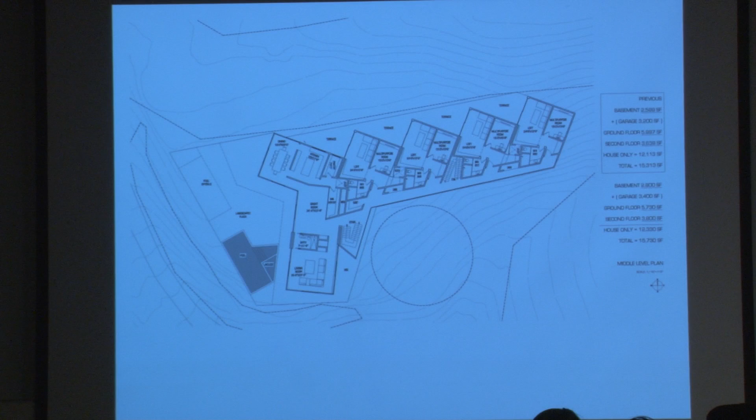So we said, look, there's a lot of properties out there, we're going to go find you a new one. Why don't we do a fancy house on the site and sell it, and then use the money to build you this dream house.

So we started to look at a building much like before, with a footprint that was substantially smaller, not sprawling out as much over the site, but fitting in between the protected zones we needed to stay away from. Being contextual, in the same way we looked at the Chapter Drive site with the modern house and the other traditional ones, we started to bury the things that don't need light and work our way up to living spaces where we can bring in a lot of light and look out over a reflecting pool to the ocean, then bedrooms at the top.

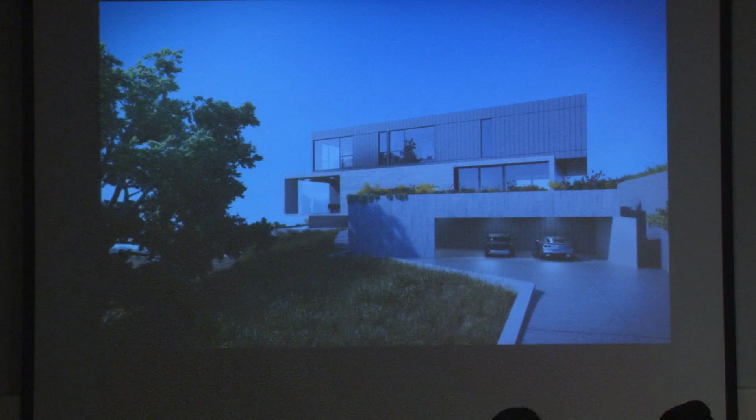For the site, because it was so steep, it really became about this motif of staggering the blocks, responding to the topography, and staying underneath the envelope we needed to. So this is coming up the driveway into a carport and then the garage, and the middle mass is the common living spaces with bedrooms above.

So really, what was a huge project that we were really sad to see go has turned into another really beautiful project that we're very proud of. It's all to say that you can't get so devastated when things don't go your way that you just throw your hands in the air and give up.

The last couple projects I want to show you are really about the shift in scale that's happened within the office in the last couple of years, going from mostly residential jobs into a little bit larger buildings, a lot of multifamily. As the office has grown and you have more projects similar in typology and scale, one of the things that becomes really difficult is how you continue to be unique, how you continue to do things a little bit different each time, so that each project has its own identity.

These two projects I'm showing side by side are two 4-unit townhouse projects, the top one in Burbank and the bottom one in Glendale. These projects have very similar scale sites, the proportions are very similar, and the size of the buildings are very similar.

We ended up, even though we went through a number of different iterations and configurations for the site, with two buildings that essentially had the same site plan strategy: taking this block of the townhouse and shifting it back and forth to create something a lot of apartments and housing in Southern California doesn't have, a little garden area, a little yard area. The strategy worked really well, but we didn't want to do the same thing twice.

With each of these, we looked at it as, all right, we can have the same site plan strategy, but the ultimate building massing needs to have some difference in identity. That was really in response to this urban condition that we have in a lot of cities, which is you're looking out at the neighbor building. So what we wanted to do is find ways to get greenery, get landscape into the buildings, more engaged and closer to where people live and the spaces they occupy.

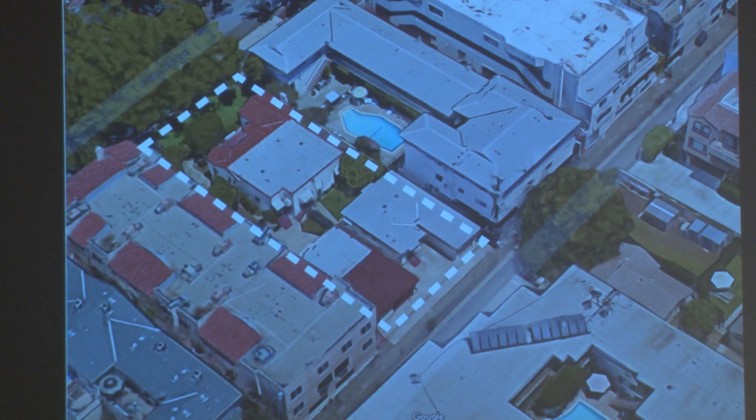So this is the first site, this is in Burbank. Again, the shifting. Really simple floor plans, very similar to what we did on that first multifamily project. Open space, kitchen loaded to the back with the garden off of the kitchen for a little barbecue area and raised planter bed. And then bedrooms to the top.

To this point of adding something of value, we knew we didn't want the square footage to be such that it just didn't fit into the area, but we had this opportunity to go up a little bit higher. So what we did is we created these roof terraces on top of the building, which gave us another opportunity to introduce some planting within the building footprint. That way everyone has their garden at the ground floor, a place where they can grow vegetables and have their barbecue set up. And on the roof, they really get their backyard - a place that's special where you get good natural light and air. It was really kind of stealing free space. You build the roof anyway, you might as well give people the opportunity to go up there.

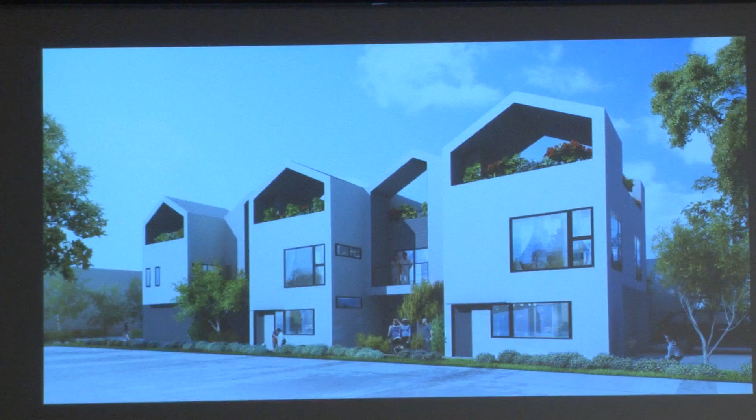In this scheme, it really was about the expression of the block. It was about this really simple mass, kind of an archetypal house, shifting it back and forth. We called them the monopoly houses - like how kids draw houses - making a really simple set of masses that are playful with a couple different materials.

This one's pretty successful, and we're in the process of getting this approved with the city right now. It's funny because as simple as this is, and as much as it looks like a lot of other housing, the city in some ways doesn't know how to respond to it because it is a little different. They don't understand why we would have gardens on the roof, and the concern is, well, aren't these people going to look out at the neighbors, and see into the neighbors? And we say, well, how's it different than a window or a balcony? It's exactly the same scenario. You open your windows and you can see your neighbor, but things that are different challenge people - you have to be persistent with it.

The second project that had the same or similar site plan strategy was the one in Glendale. Again, a 4-unit townhouse project, this one with subterranean parking. Again, shifting the masses back and forth and giving people the opportunity to have a little green space that they normally wouldn't have. Open floor plans, really basic, simple units, bedrooms.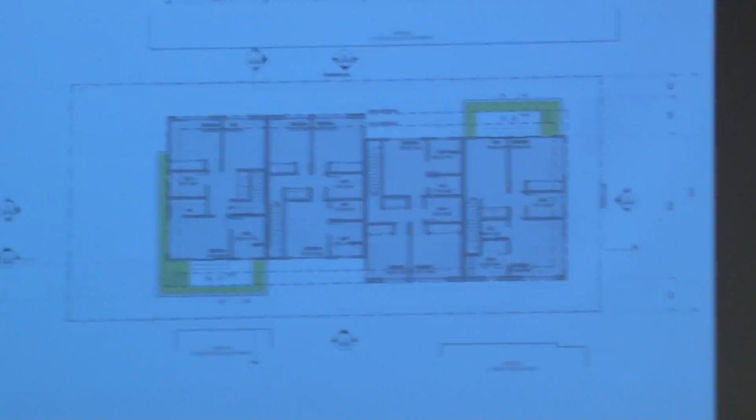On this one, where the first project was about the expression of the unit and the legibility of the unit, on this particular one we figured out by making one additional shift in every other block, we could transform the building from something where it was really legible what the individual units were into something that really obscured it. The legibility of the unit is shifted from something linear, going in the direction of the site plan, into something much more interlocked. Although the units are either a white block and a wood block, or an all wood block, or wood and stucco, by that shift in plane we were able to transform this into something a lot less about expression of the module and a lot more about this interlocking.

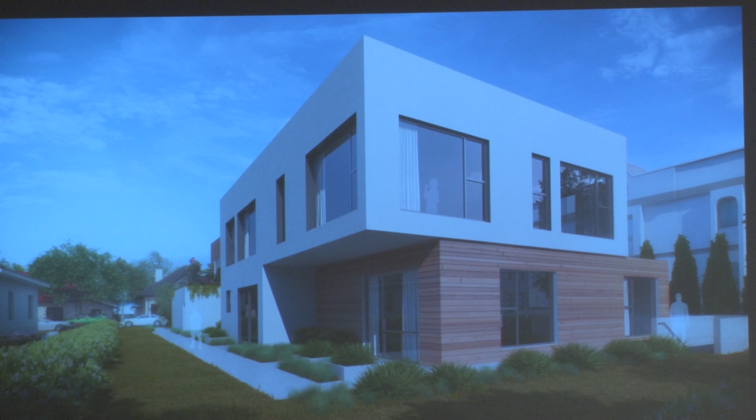And that interlocking works both in plan and section. Again, pulling the landscape up into the building and giving people the opportunity to have outdoor space and greenery in places you don't normally see. And those two side by side - basically the exact same footprint and the exact same size building.

The last of the multifamily projects I'll show you today is one where, like we often do, we looked at a site and its constraints and asked: what's our biggest challenge here? How do we turn that challenge into our biggest opportunity to do something different? In Glendale, the biggest issue with this particular site was that the zoning in the area basically wants everyone to build a pyramid.

And I know you guys have a pyramid here. I just figured that out today, so I'll skip my pyramid joke.

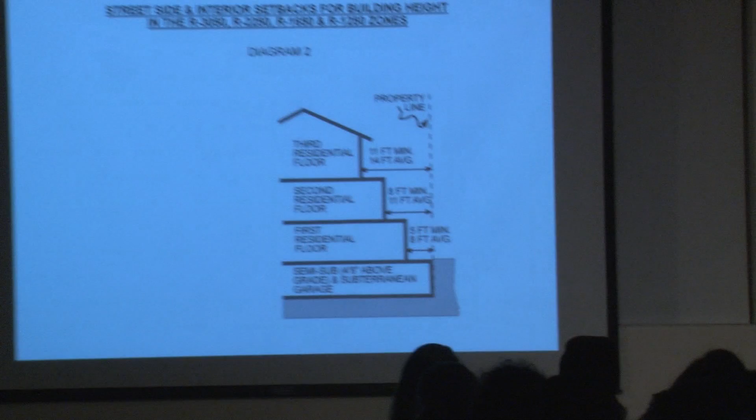But that wasn't something we really wanted to do, because when you have strict rules like this, all the buildings end up looking the same in an area. That's one of our biggest challenges dealing with planning commissions and cities — they see the way a thing looks, it gets approved, and then suddenly everything starts to look like it.

So what we figured out in going through the code was that although there were these steps, minimums, and averages, ultimately what they looked at was the average setback. We said, all right, I think we can figure out a way to beat this system.

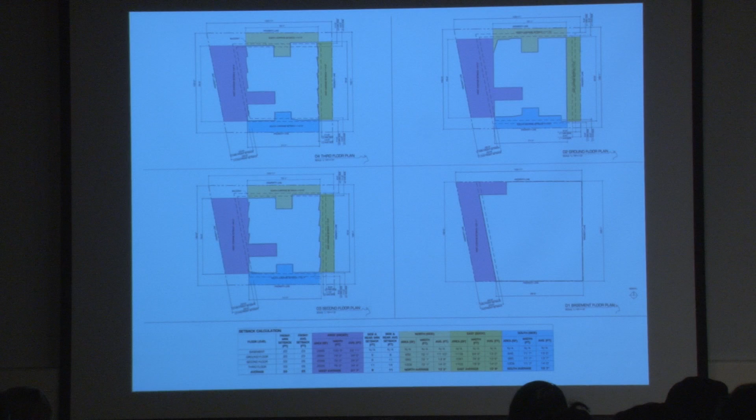So what we did was, since what really matters is the average setback, we made huge incisions into our building — represented by the cuts in the white block where the color spills in. These incisions allowed us to bump up our average, so we could push our building all the way out to the minimum setback, but that cut-in gave us the average number we needed. It let us do something very different from what they were used to seeing.

It also gave us the opportunity to pull the gardens farther into the building, to provide private gardens for a couple of the units, as well as communal garden spaces where people could put picnic tables and share.

So it's a really narrow footprint, with a very open plan like all of the others — one bedroom on the second floor, and then a master suite on top. All of that stacked up got us to this.

When we took this into the planning commission, you submit the drawings and wait a couple weeks for somebody to call you back. We got really nervous because we got a call from the head of planning in this area, and he said, 'I want to meet with you guys on this.' We thought maybe we were in a little trouble for what we tried to do here.

He actually came in and, much to our surprise, said he was really excited that we figured out a way to do this, because the city has an issue with everything starting to look the same. It's really encouraging to hear things like that, because you realize that although there are systems in place that drive us in certain directions, people really do respond to things that try hard to be a little more unique.

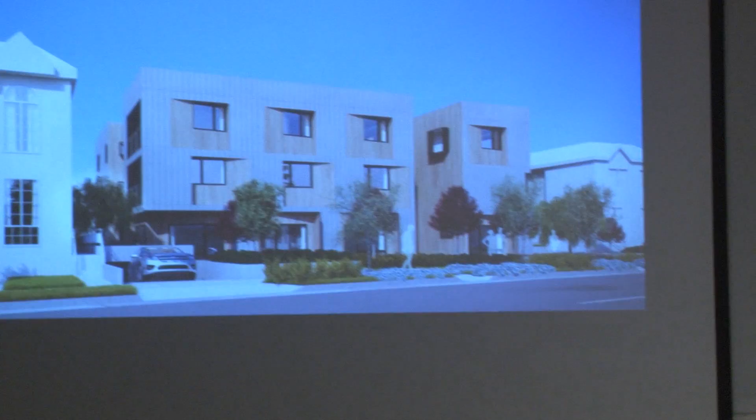In addition to those big cuts, we made a series of smaller incisions into the building that allowed us to create a bit of rhythm and play within the mass. The cuts always have these boxed-out windows just to define a different type of space.

For some reason everything's a little squished in these renderings, but on the back of the building you can just get a sense for that rhythm.

And then, ultimately, taking this parkway and pulling it into the building — we talked a lot about making this feel like a series of blocks sitting in a park.

One of my favorite professors in school, and I'll end on this, used to say whenever anyone said 'we're kind of playing around' — 'this isn't play, this is serious business.' But I never really bought that. I think you can have a lot of fun, and I think what we do should be fun.

That's the last thing I'll talk about — one of the things we do in our office from time to time when we have a small, manageable project, like a furniture design piece or a sculpture, that we can quickly look at as a group.

We do kiosks or things like that. What we'll do is a little charrette: get everyone in the office together, say, all right, everyone's got an hour, come up with some initial ideas for this problem. We get out the bottles of wine, have some lunch in the afternoon, and work our way through the problem. That's our way of giving everyone an opportunity to be creative.

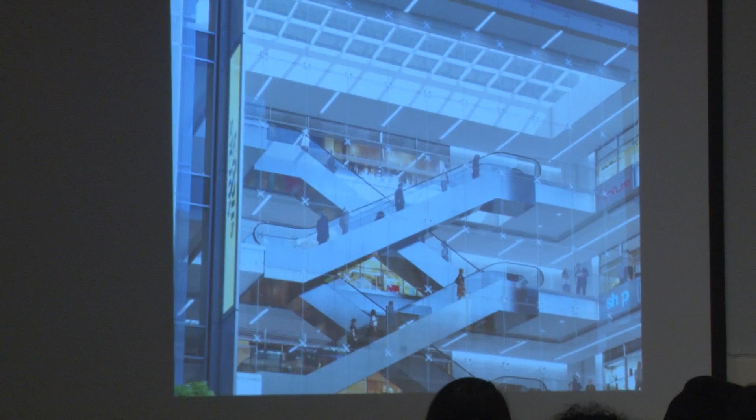This particular charrette was for a sculpture that was going to hang in the atrium of a 5-story lobby in San Francisco. This was a space Gensler had designed, and they never really knew what they were going to do in this skylight, but they knew they wanted something to hang underneath. They also needed to cover their 1% for the arts requirement, so they came to us and said, hey, would you guys be interested in designing this thing that hangs up in this space?

This is Market Street in the foreground, and there's this axial relationship between the street and the atrium. Of course we jumped at the idea. It wasn't the easiest thing in the world—we had to convince the planning commission that we were artists, since they didn't initially believe architects could be artists. But I threw together some paintings from college, and a short 12 months later, we had approval to design this piece of artwork.

In this charrette, the ideas everyone was drawn to—this is Angelenos considering San Francisco—but everyone was really drawn to the bay: the biology of the bay, the topography, the refraction of light on the water, and ultimately you can't do something in San Francisco without referencing the Golden Gate Bridge and the fog. The imagery people brought was really about the bay, so we ran with it, and everyone went back to their desks and started producing sketches and digital models.

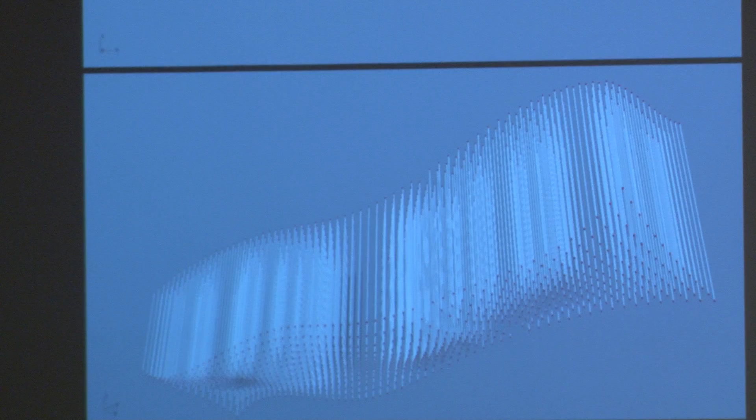One of the ideas we were really drawn to was this idea of the cloud, the fog—that through pieces of aluminum, through something built, we could replicate the ethereal qualities fog is about. The other thing we were looking at was refraction, and how refraction could manipulate a topography.

Through iteration, looking at these ideas and honestly not being able to make up our mind, we said, all right, let's look at this as a hybrid—combining these ideas into something that embodies and captures both things we're trying to achieve. We started to look at it as: what if we have this vessel that sits within the fog, and as you move up the escalators through the space, your understanding of this object fundamentally changes based on how these rods, how this fog, obscures it or reveals it.

We took this and worked completely digitally, but it wasn't doing the things we anticipated. What we realized was that the computer model wasn't doing the things a physical model would. So we started to prototype it—built the atrium, got the space, set it up with lights, and started prototyping this thing with, I think, 15 different variations, looking at it as a field of pipes or fields of screens.

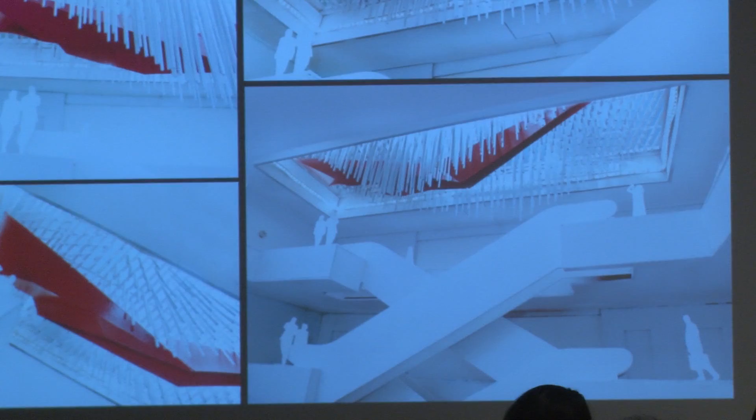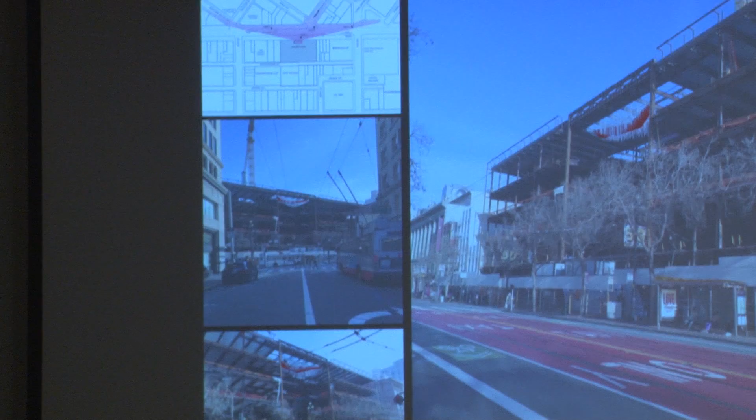Ultimately we arrived at a series of 3.5-inch painted rods arranged in a random pattern derived from a sine curve. We wrote a script in Rhino and worked out of Rhino and Grasshopper to create this randomized field in a physical model. The thing was starting to work, and we were starting to be really happy with it. So we tested it, looking at it for scale, the site, and the view angles for everything.

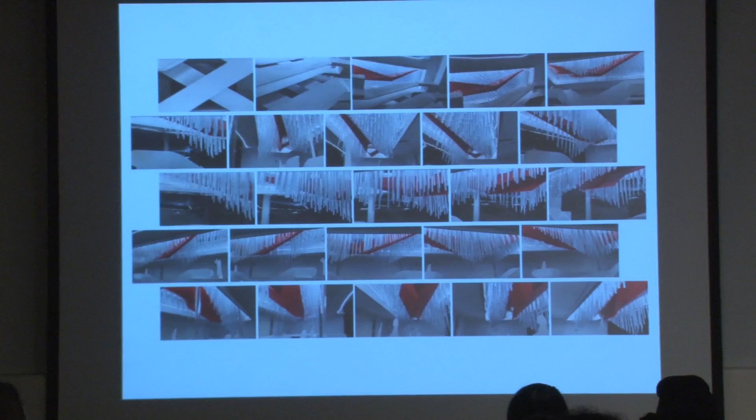And then ultimately, we took this thing to planning, which we knew the biggest struggle we had was how you convey this idea of something ethereal in something static. So when we actually went to the city, we took a video of it that I unfortunately wasn't able to make work on my computer, but these are some screen captures from that video that they ultimately approved.

And we were given the green light to move into production. So then from the physical model back into the digital, because of the complex geometries, this was really something that had to be analyzed with engineering software. Some of the diagrams show the deflection in the piece, and then once we knew it was secure and not going to move around too much in an earthquake, we started to work on the detailing and the panelization.

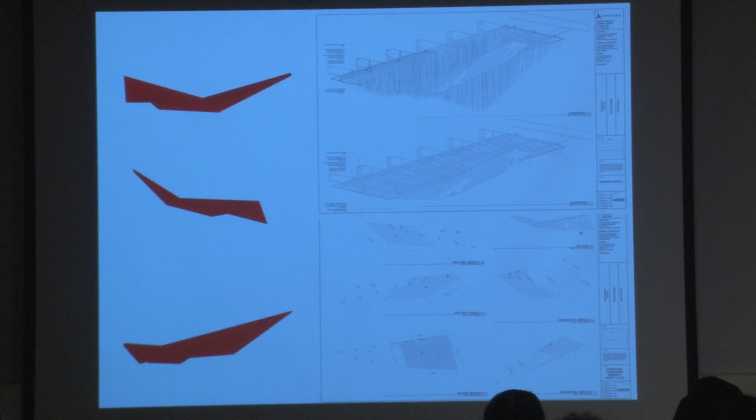And then ultimately, the thing became this. And they are currently installing the brackets for it. So that's the last I'll show.

One thing I will add to the end of this is that none of this is possible without a really great team, and we have a really great team of people making all this stuff happen. So thank you.

Any questions? Oh boy.

I got LEED certified. I took those tests a long time ago, and the LEED accreditation is an important thing in that I think it gives you an opportunity to study and learn things that are really important for people to know. LEED as a thing, I have my doubts about, but sustainable design I think is far more important. My biggest issue with LEED in general is the way it analyzes buildings.

In a lot of ways, I think what we need to be looking at is the carbon footprint of the things we do. It becomes more of a performance where you look at all the carbon you're using, add it up, a little bit more like the CASBEE system works. With the point system LEED has, you end up in this position where you go, okay, we need one more point, let's put some carpet in a closet so it gets the rating needed to get the point for carpet. So in idea, I think it's very important.